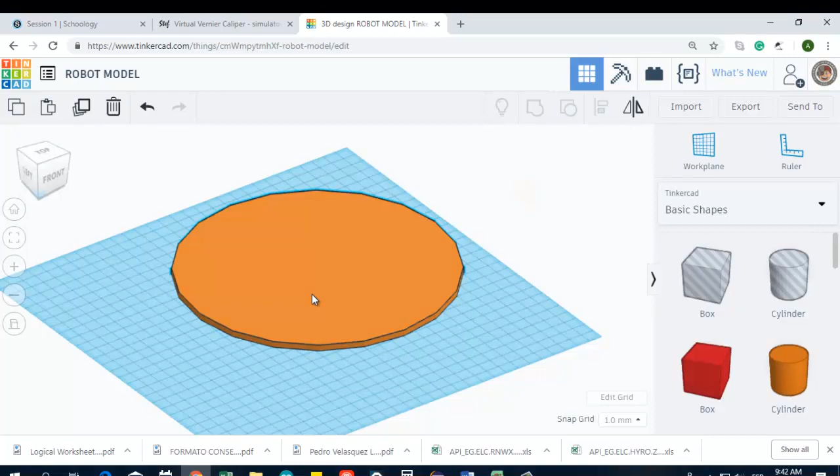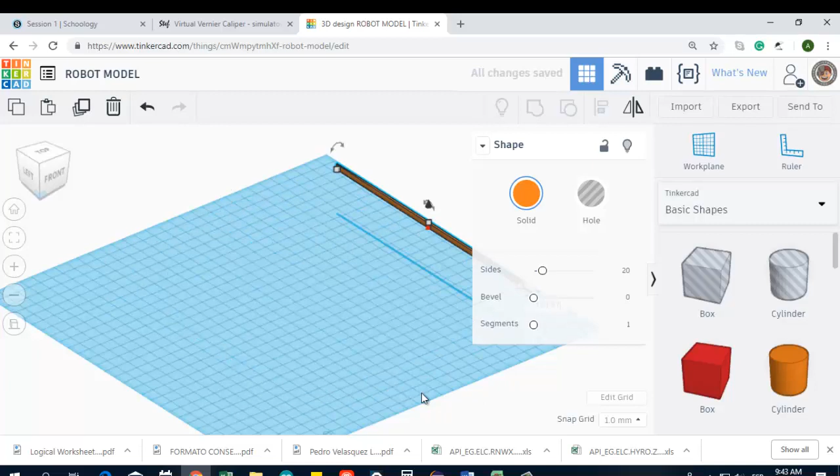Let's start creating a cylinder, and this cylinder will require a width or length of 22 centimeters, so 22 centimeters will be 220 by 200. Okay, so here we have the base of the robot.

It's not a perfect circle, it's a little bit more wide. Our base also has some little cuts right over here where the wheels are going to go, so it's important that we do that. Oh, and of course the height.

The height is 3 millimeters. So we have the base of our robot. Now let's make some holes that are cut inside. These holes are 3.5 centimeters by 8 centimeters, so in millimeters that will be 35 millimeters by 80 millimeters.

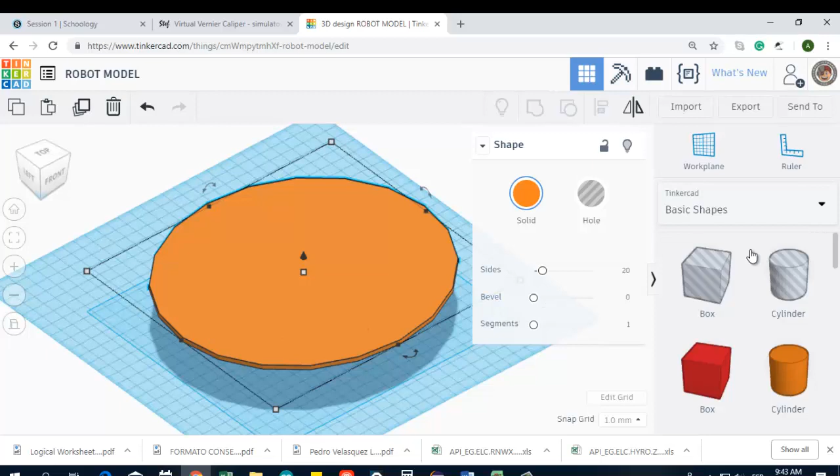Let's make a box right over here. The height doesn't matter, because I'm going to cut inside the shape, but I need this to be 80 millimeters by 35 millimeters. So basically this is going to be the hole that I need to make.

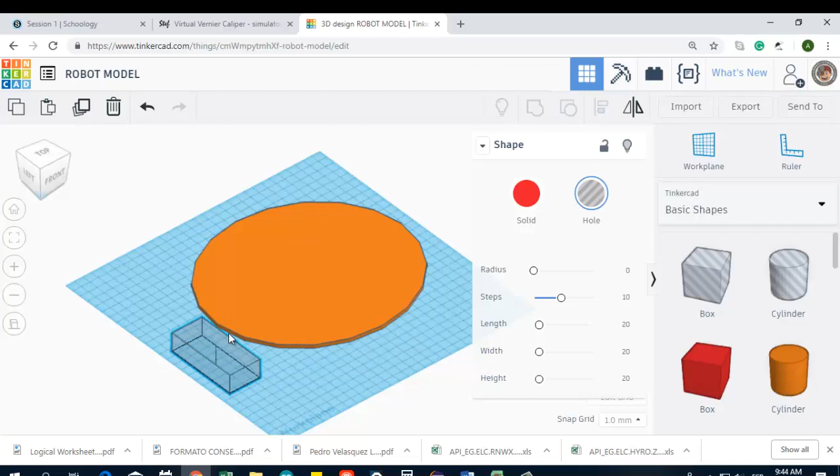This is exactly the hole. So in order for it to be well placed, I can use the top view. First I can click on orthographic, that way I can see it straight right in there.

I need to align it with my circle, so I'm going to shift-select both objects with the shift button pressed, and click on align, and I need to align them this way only. So I know it's right in the middle.

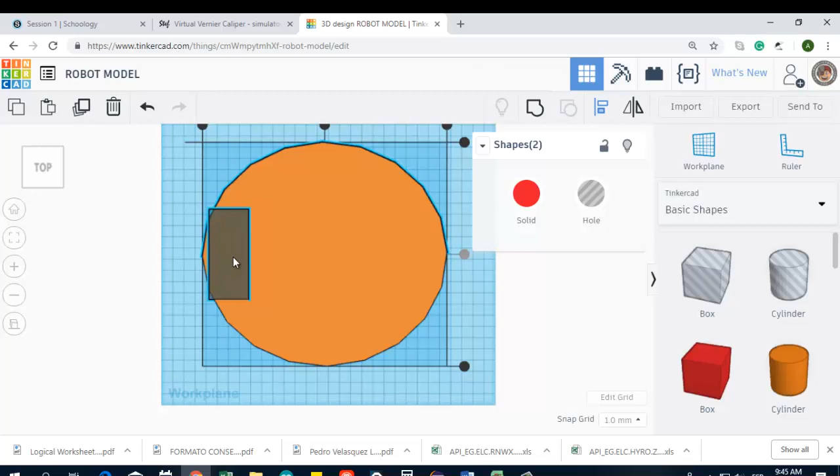Then I can select it, and I need 3.5 or 35 millimeters right here, so I'm going to move it just a little bit. Make sure it's there.

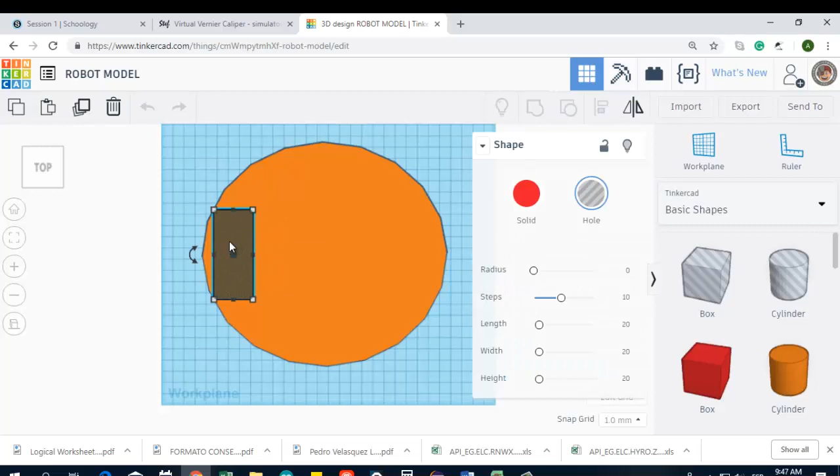Now I'm going to do exactly the same with the other side. I'm going to copy and paste, or duplicate my box, and take it right over here and do exactly the same. I'm going to try not to move it.

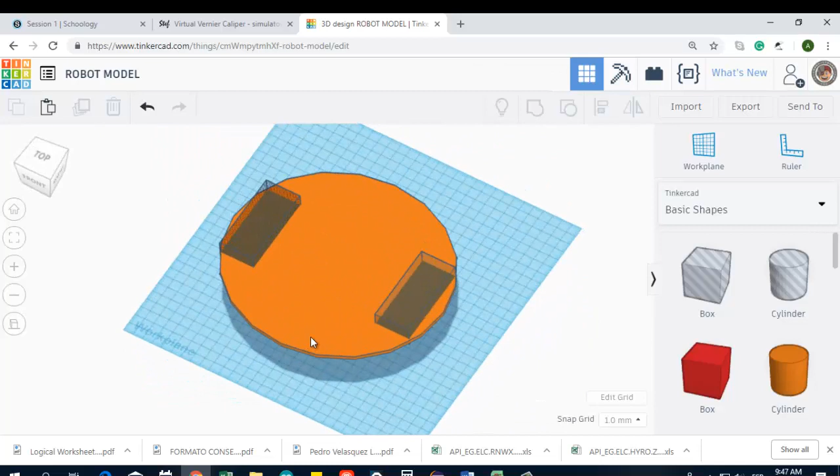That's pretty good. Since I need my hole to come out completely, I am going to extend a little bit the width of my boxes, just outside, so I know it's going to make a perfect hole.

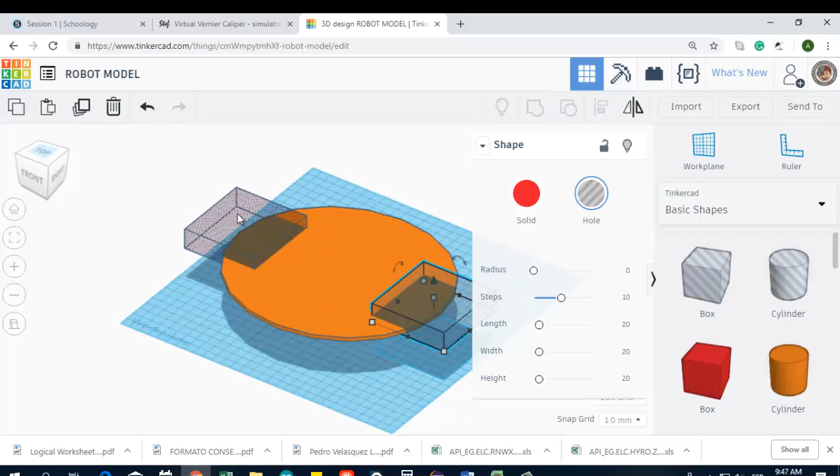Now how do we make a hole? Very simple, like we've done before. We select the holes and also the shape, then we click on group, and here we have our hole. This is very similar to the shape we were doing, the chassis.

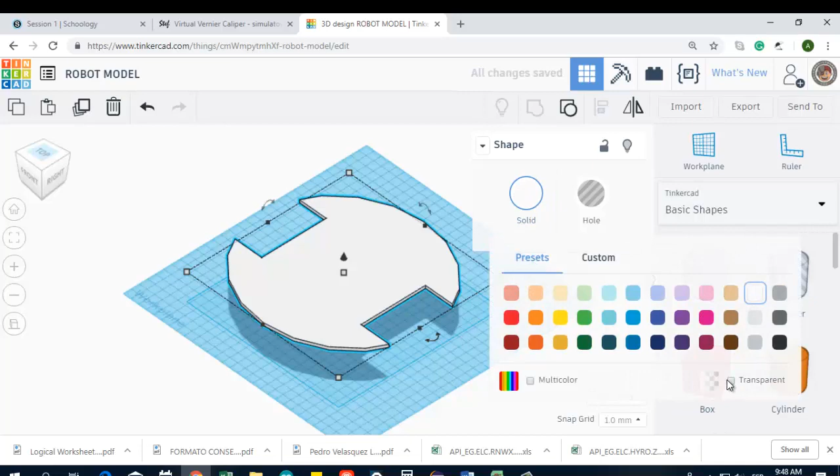Now we just need to make it transparent, that way it's going to look more and more similar to the robot that we're working on.

Very good, let's make sure that we did it in the right place. This is the length and this is the width. Very good. Now what's next is...

Locating the different components of a robot, as you can see with the original robot.

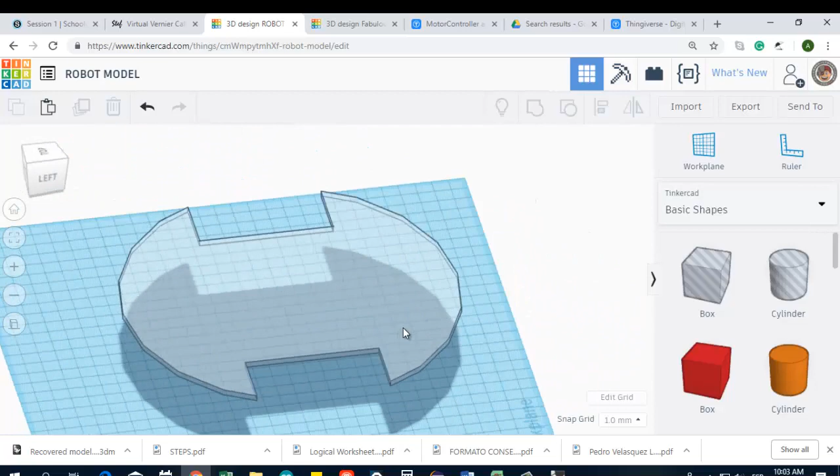Next step is adding a few elements to our base. Remember to measure where each portion is located, since you're going to have the physical elements in your hands. So the other one that we need is the Arduino. I'm not going to place it exactly where it's supposed to be, because that is your job.

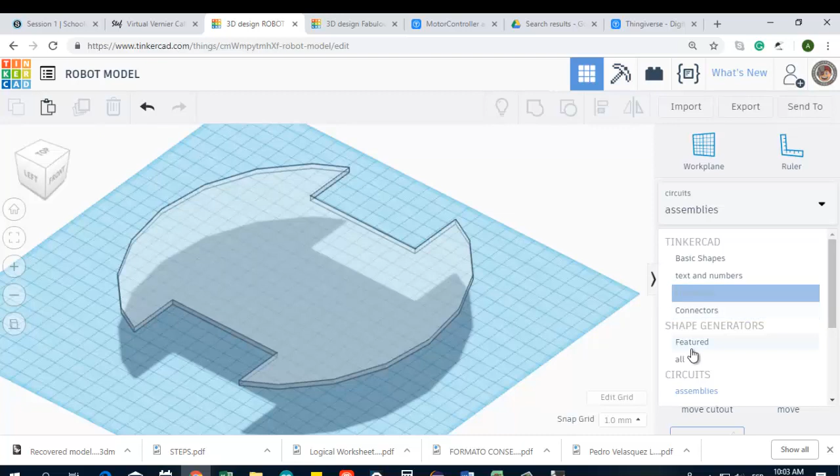So if you go to circuits, let's look at all the circuits, and some components can be used, one of them is the Arduino. I'm just going to place it on top, and remember I'm not going to do it exactly as it's shown.

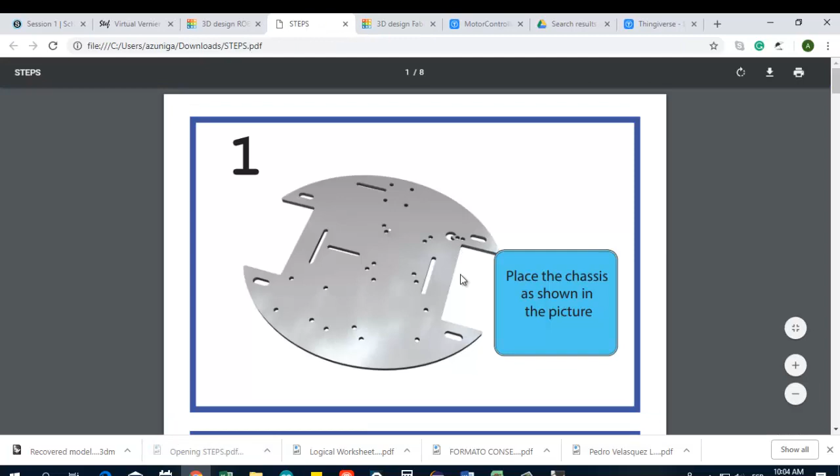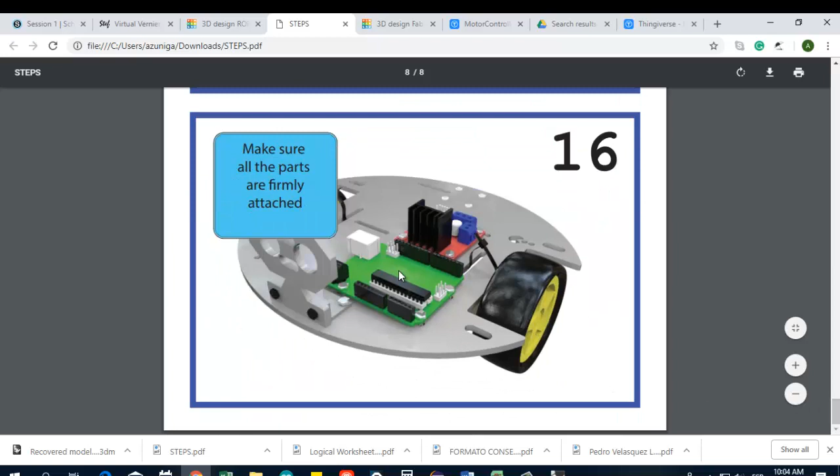If you want, using the manual or the assembly steps I'm going to give you, you can check out at the end the final picture of how it's supposed to look. So this is the front and this is the back, and you're going to try to do it exactly the same.

So I'm going to just place my Arduino. It looks similar, so I'm going to rotate it that way. Apparently this is going to be the front and this the back for my case.

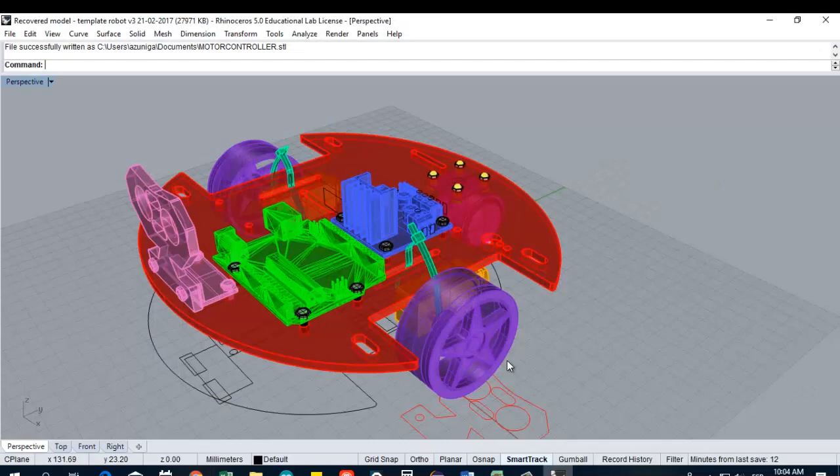Now for the second part, where you see this motor controller, I designed it using another program called Rhinoceros, which you're going to learn how to use in high school.

So this motor controller I uploaded to Thingiverse. If you go to Thingiverse and look for motor controller azuniga, you're going to find the STL file. The idea is that you download this file and import it to your design.

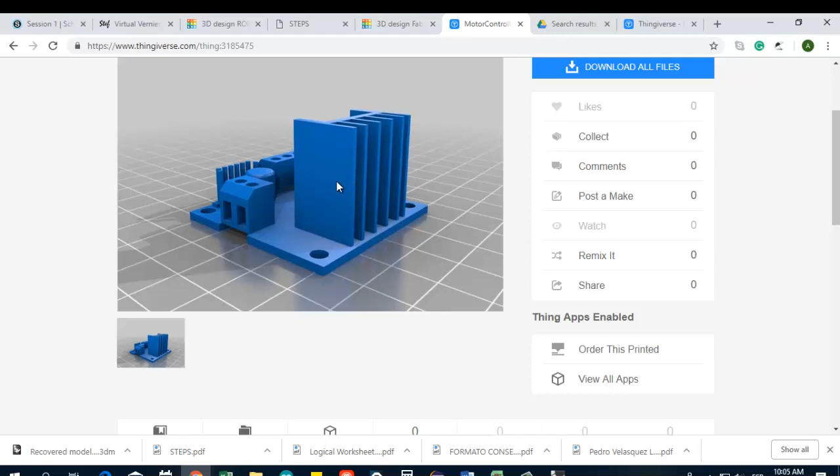It's very simple. First, click on Thing Files, then Download. If you click on it, you will download the STL file, and very easily you just go to your design, click on Import, and choose the file that we downloaded.

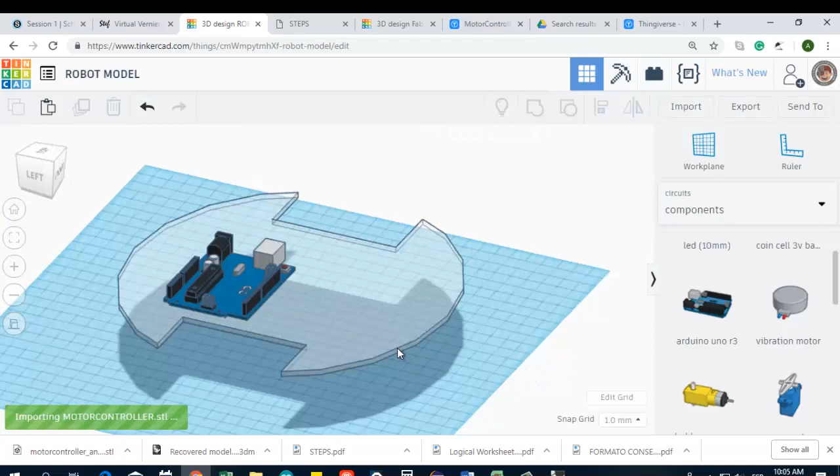Now it's importing, and now you can grab this file and place it where it's supposed to be. It's as simple as that. So I'm not asking you to design the whole component, you just have it there.

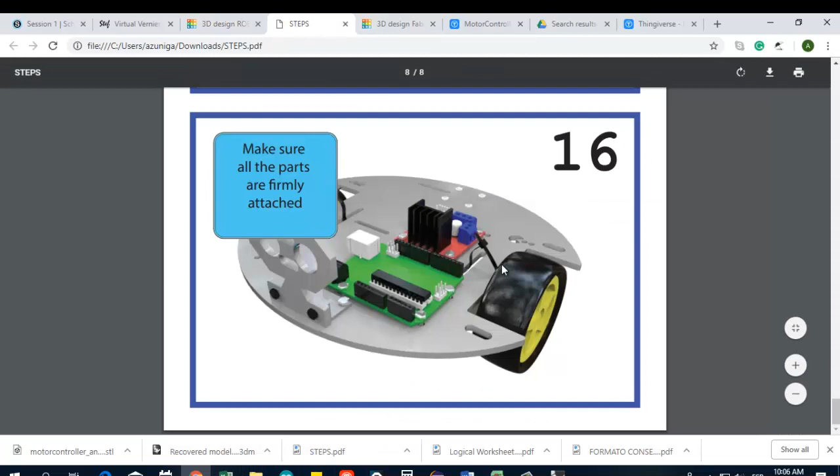And you're going to locate it the best way possible as seen in this picture. So this is all for now, try to play with it.

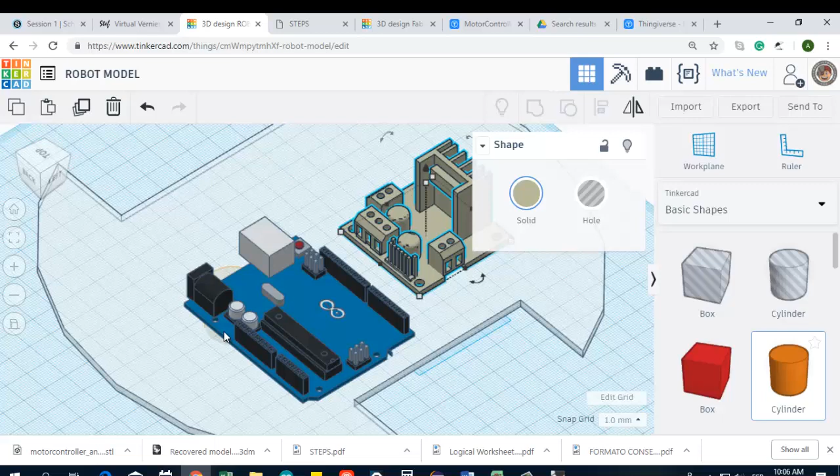Something you can do is start opening the holes on your design. All the holes should be aligned with these, so just make some simple shapes, some simple cylinders. Those cylinders are pretty much 3 millimeters by 3 millimeters.

So it's interesting, and let's try to just locate them as best as possible. Let's try to put this up. Remember that the only way you can use them is if you pull them up.

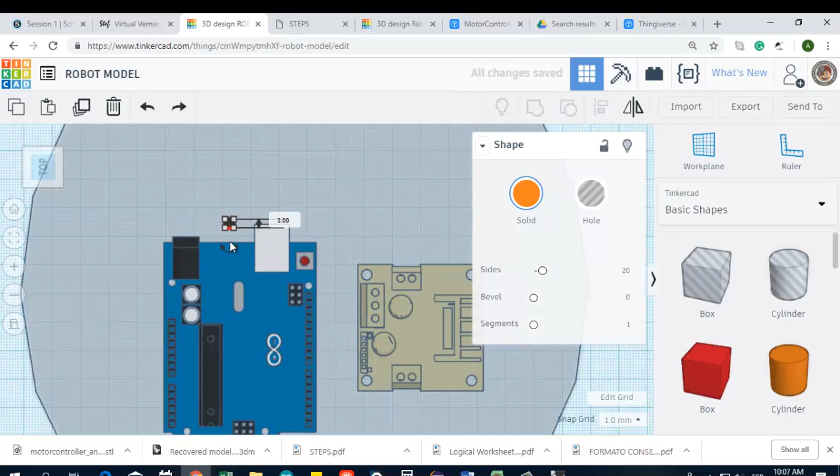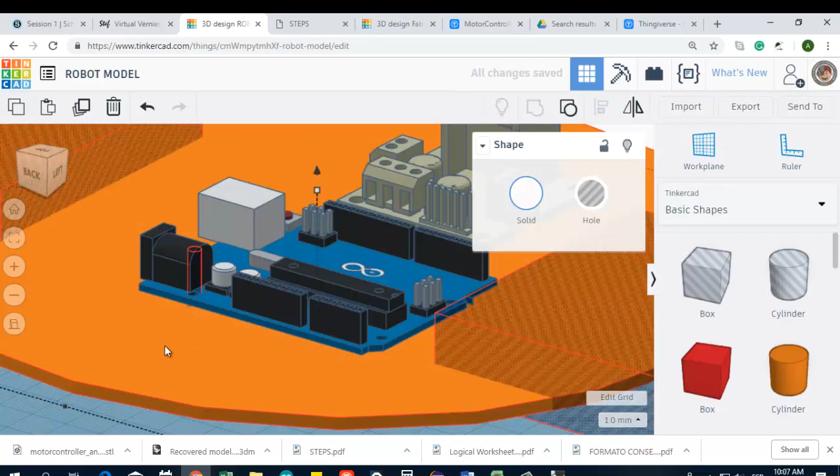Now from the top view, I am going to align my cylinder the best way possible, and then turn it into a hole. I'm going to put it right here and make a hole on the base. That is really important, so I'm going to click on hole, select the base and the hole, and then group, and here you will have a nice hole on the base.

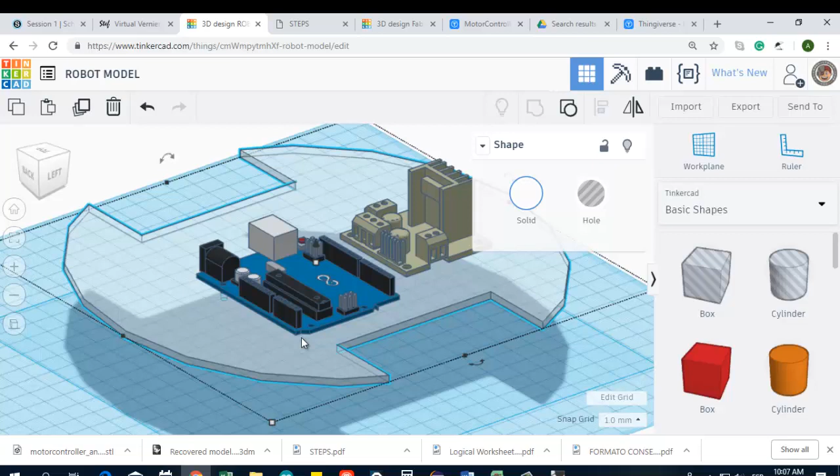So you should do that with all the little holes. Now this is the real scale, we're talking about real measurements. This is engineering, so everything you do here can actually be built, laser cut, and then produced. Good luck with that, and see you next tutorial.